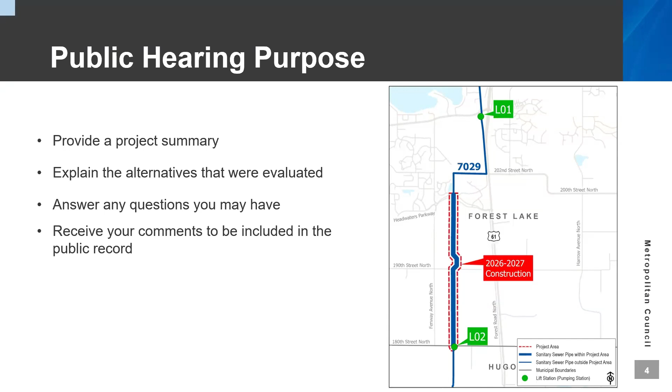Again, the purpose of this public hearing is to summarize the proposed regional sanitary sewer improvements project and explain alternative approaches that we evaluated, answer any questions you may have about the proposed project, and receive your comments for the public record.

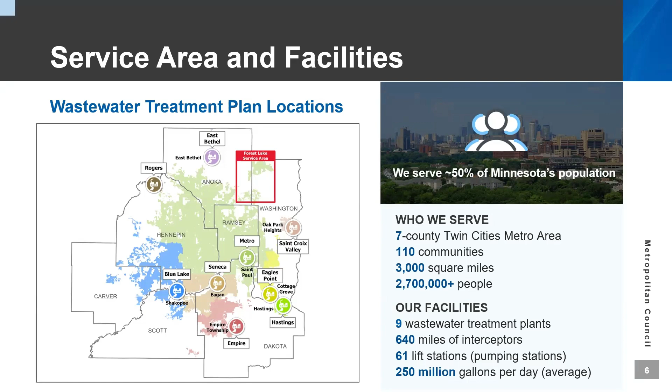Now let's talk about the facility plan. What is a facility plan? It is a prerequisite for a portion of the financing on environmental services projects. It summarizes the current state of the existing wastewater sewer system, identifies the need for improving existing facilities, determines the potential environmental impacts of the improved facilities, and recommends a course of action.

For the last several weeks, a paper copy of the draft facility plan has been available for the public to review at the Hardwood Creek Library and Forest Lake City Hall. An electronic copy of the draft facility plan is available on our project webpage on the Metropolitan Council website. We'll continue to have the facility plan available until 5 p.m. on Monday, December 2nd, 2024, which is the end of the public comment period.

On the screen, you can see the various ways you can submit. It's not on the screen. We'll probably have the comment period come back in our slide towards the end. Do I need to read these definitions?

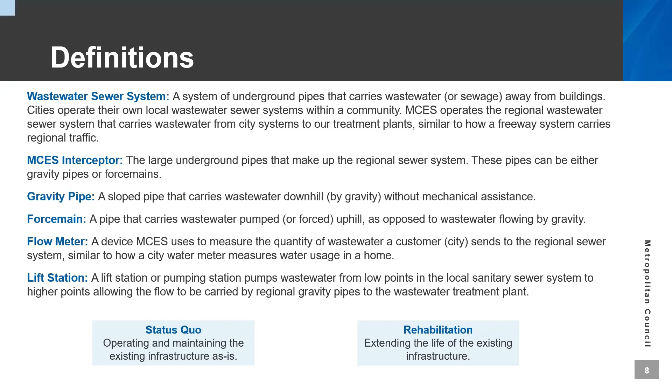A flow meter is a device used to measure the quantity of wastewater a customer sends to the regional sewer system. A lift station is a station or pumping station, and it pumps wastewater from low points to higher points. Status quo is defined as operating and maintaining the existing infrastructure as is. And then rehabilitation, whenever it shows up, is extending the life of the existing infrastructure. And now we're going to talk about the project.

Yep. Well, thank you, Natasha. Thank you, Peter. My name is Paul Herubin. I'm with Environmental Services. I'm the principal engineer stationed out of regional maintenance out of Eagan.

So the main project drivers here are to maintain reliability in our system and preserve our precious assets. An interceptor sewer is an asset and needs to be preserved. Improve the operational flexibility, efficiency, and safety. We want to make sure it's efficient for our operators to go out there and do the routine maintenance. And first and foremost, we want to protect the environment. This is a pristine area up here in Forest Lake, so we want to protect that. As Natasha mentioned, there's 640 miles of interceptor in our system, and this project will rehabilitate about 2 miles of that. We strive to maintain first-class interceptor service to everyone.

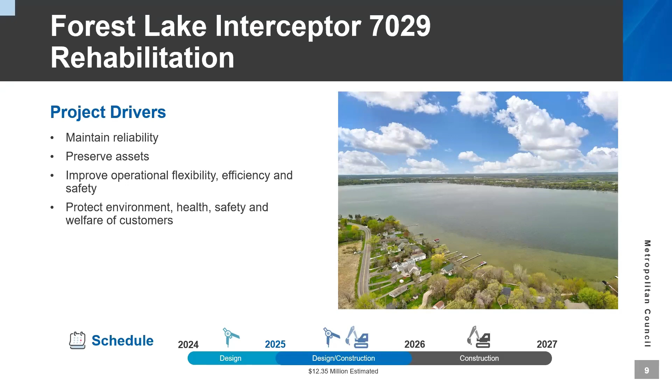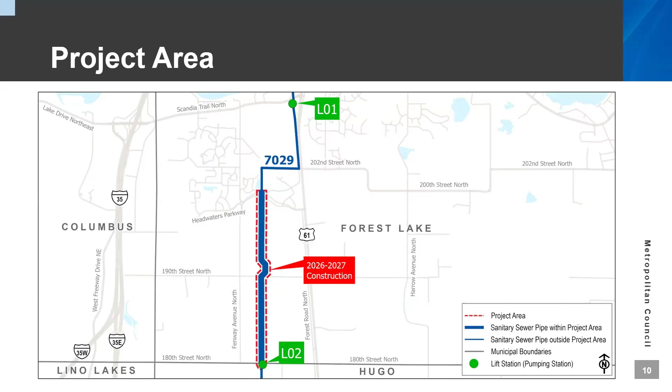So the project area of Forest Lake includes the city of Forest Lake, as well as the neighboring community, the city of Columbus. Everything from the city of Forest Lake comes in mostly along Headwaters Parkway. There's a city connection right there. That's where the Columbus system comes in just a little bit north of there. All that comes in and then it flows to the south and eventually makes its way to the Metro plant, as Natasha described.

So a little history on this pipe. This pipe was built back in the early 1970s. It's made out of reinforced concrete. The Met Council assesses its condition. They go out and inspect periodically, and their inspections are indicating that the pipe's in pretty poor condition, which can be expected of a pipe that old, made out of concrete. This project will rehabilitate about 11,000 feet of this 36-inch pipe. It extends from Headwaters Parkway all the way down to 180th Street, which is the Hugo line. We're also going to replace 6 maintenance access structures and rehabilitate the other 22 maintenance access structures.

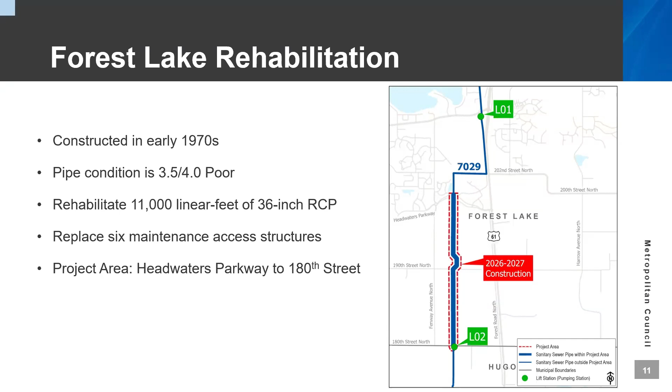So the root problem here that we're trying to resolve is we've got aging infrastructure that's degrading, and it's part of our asset management program to rehabilitate this pipe. There's also a significant amount of sediment in this pipe. It's accumulating and it's even beginning to calcify. So it's critical that we remove that sediment and improve the flow characteristics. And this interceptor is located in a lot of environmentally sensitive wetlands, this pristine lake area up here. So we want to make sure we rehab it in the most environmentally friendly way.

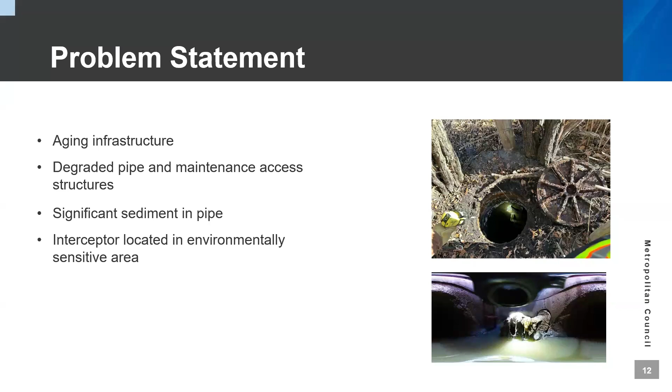So part of the facility plan process is to evaluate several alternatives. You want to come up with the most optimal solution to our problem. So one option, of course, is to do nothing. That's an option that's always evaluated in a facility plan, and sometimes that is the best option.

But on this project, we also evaluated state-of-the-art rehabilitation methods, such as cured-in-place pipelining, slip lining, maintenance access structure rehabilitation, which could include cured-in-place, or include inserts. And so for this project, we went with the rehabilitation.

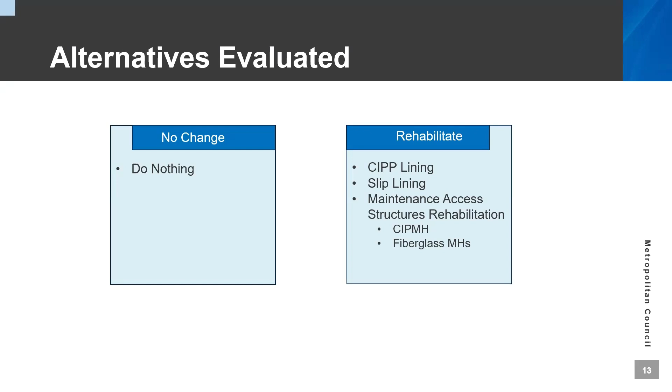Another thing that's evaluated is non-monetary impacts. So the criteria that was evaluated for this, either being the status quo method or the rehabilitation, was operability, maintainability, implementation, environmental impacts, constructability, and in the end, we went with the rehabilitation.

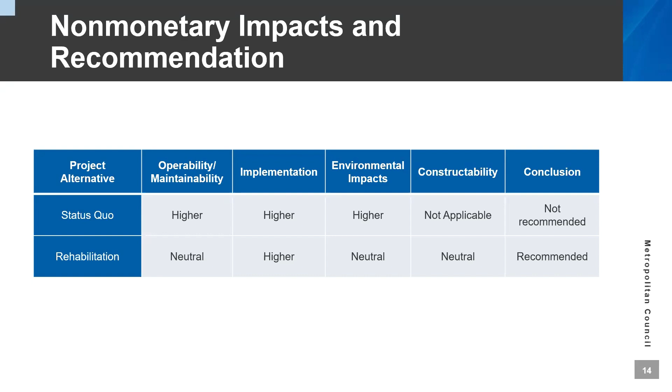So the overall project goals here are to increase the operational lifespan of the sewer, because this sewer is reaching the end of its operation life. Want to improve the flow characteristics. That just makes things run more efficiently. And want to minimize environmental risk. We are in a very pristine area up here, lakes.

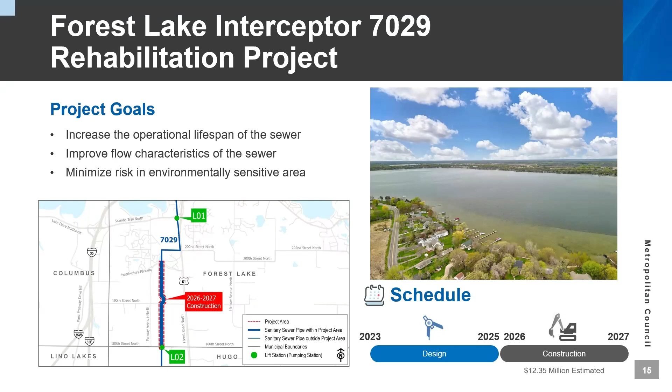And the overall schedule is, the preliminary design through final design will occur from 2023 through 2025. We're currently at about maybe 60% design. And then construction, we anticipate will be 2026 through 2027. Construction will be done in phases, so it will take a while.

So the different methods that we looked at for rehabilitation is, we went with industry standard methods, so we're not being pioneers here. We're going with tried and true methods that have worked for the council and for other large utilities nationwide.

And that same method can also be used in manholes, or it should be maintenance access structures. So basically, it'll conform to the inside of the structure, and it'll be cured. Another method for rehabilitating maintenance access structures is through inserts, fiberglass inserts.

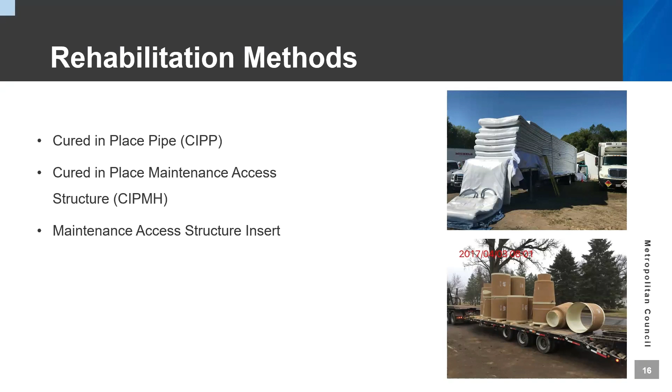An important aspect is temporary conveyance, because a project of this magnitude, of this type, requires that pipe be thoroughly cleaned, and it needs to be dry throughout the process. And there are millions of gallons of flow coming through here 24/7, 365. Wastewater doesn't sleep. Wastewater doesn't take a day off. So we have to convey this temporarily.

Everything is performed in stages, so that way it makes the project more workable. Plus, we've got to work seasonally because we want to utilize winter for areas where we need hard ground. And it is a redundant system, so if one of the pumps fails, there's two pumps there. They're working in tandem, and two pipes as well. And it's monitored with alarms, so they'll be tended 24/7 by the contractor.

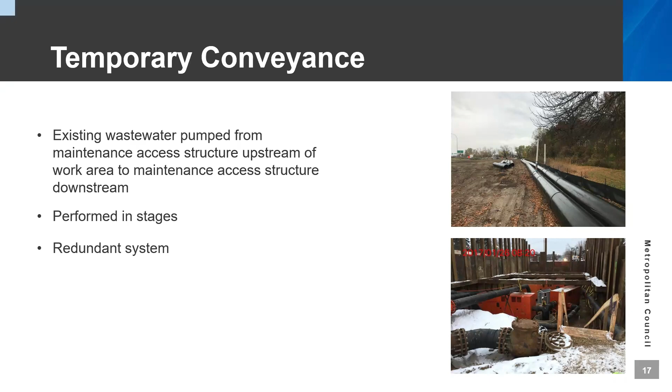Coordination. Projects of this magnitude require quite a bit of coordination. So we've already been meeting with the city of Forest Lake. They're aware of this project. We've discussed potential conflicts with the traffic control with them. We've also met with the city of Hugo because we might have some traffic control concerns right at 180th Street where the project ends. Rice Creek Watershed, we're going to be engaging with them soon.

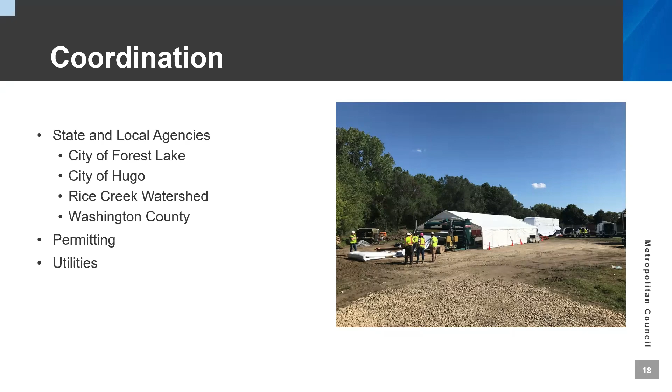And then, of course, Washington County will be involved. So we need permits for this project. We'll work on that phase of it. And then there's also some underground utilities; we've already met with the respective utilities on this project. So we have a pretty good feel. There aren't a lot of utilities here, but there are some. Most of them are in the Headwaters Parkway. We've dealt with that.

So total cost and rate impacts. For this project, we are going to be seeking Public Facilities Authority loans. It's a federal type loan paid out over 20 years. And the primary mechanisms we use for paying these loans come from two funding sources. Either the municipal wastewater charges, this is the portion of the Met Council bill that you see on your sewer bill, and also through the sewer availability charge, or the SAC. That's a one-time charge for new connections.

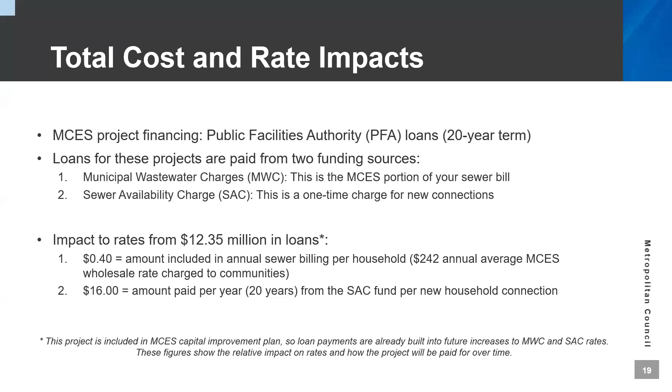So as Pratasha discussed earlier, the cost of our projects gets distributed amongst the whole system. And we expect this project to be in the neighborhood of $12.35 million. So that'll get distributed amongst the whole system, not just the city of Forest Lake, not just the landowners that live adjacent to this project, but the whole system. And our amortization calculation suggests that it'll be about 40 cents per year per resident for this project, and then about $16 per year for any new connections that occur. So that's the way the project is financed.

So for next steps, I will let Pratasha come back. Was that you? Oh, Peter, all right. Sorry. Tag them together. Open up the hearing. Yeah. Open up for questions. Yeah, thank you so much, Paul, Pratasha. Excellent job on the presentation.

I would now like to open it up to the public hearing attendees for your comments and questions on the draft facilities plan. And as a reminder, please state and spell your full name each time you speak. Also, please include your address and the organization you represent, if any, for the record.

Did we have anybody pre-register or anything like that? Online, we had no comments to date. No comments to date. Okay. All right. Is anyone in the Zoom meeting? No, this is just to be recorded. Oh, okay, so people aren't joining. Okay. And there's still a couple more slides, but should we open it up for public comment right now? Yeah. All right, let's do that. Betty, anything you'd like to say?